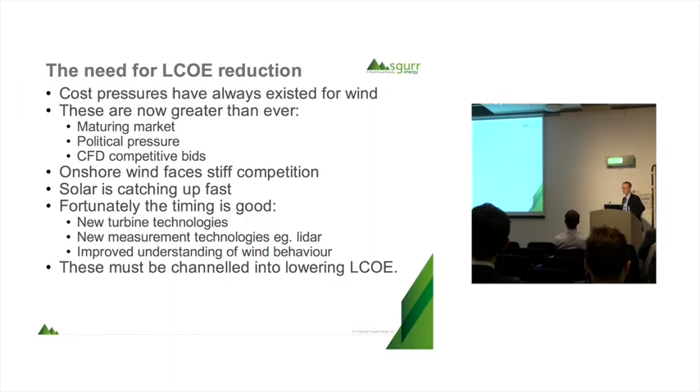Right, the topic at hand then, and the need for performance enhancement, of course, comes from the need for cost of energy reduction. Cost pressures have always existed for wind, but they're now greater than ever. We have a maturing market, we have political pressure to reduce costs to the consumer, and in the UK we have contracts for difference coming in with competitive bids, so these pressures are greater than ever.

Onshore wind faces stiff competition from other technologies, and in particular we have solar catching up fast and costs coming down very rapidly. But fortunately the timing is good, and we have new turbine technologies coming forward. We've got new measurement technologies like LiDAR, and we have an improved understanding of wind behaviour, and that all presents opportunities which can be channelled into lowering the cost of energy.

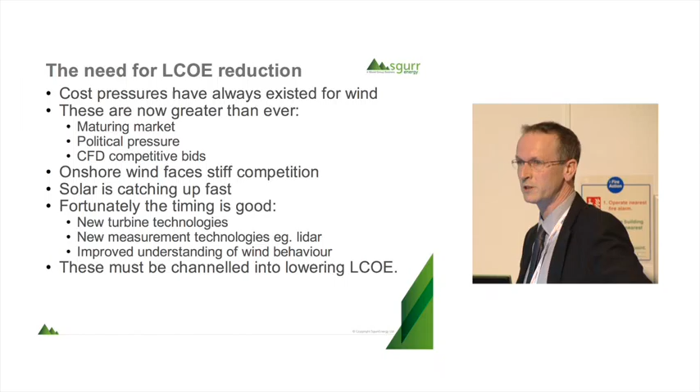How should they be tackled? Well, in various ways actually. Faster and smoother planning process has a surprising impact on cost of energy. Increased turbine size is another one, but that is in turn dictated by the planning envelope, funnily enough, quite particularly in the UK. Turbine innovation, optimised wind farm design, grid competitiveness, and grid innovation, and we are seeing some real grid innovations coming through, and cheaper finance.

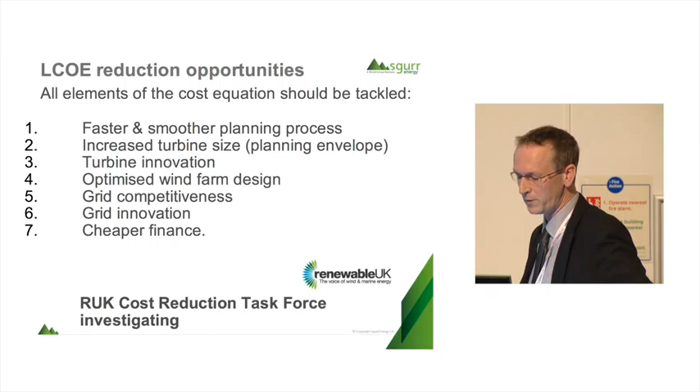So really quite a variety of issues there, and for example, the RUK Cost Reduction Task Force recently considered all of these, and we were involved in that process, and the outcome of that was the determination of active steps to ensure onshore wind becomes the lowest cost new generation technology of any type, not just any renewables, by 2020. There's a belief that can be achieved if certain things are done.

But for today, I'm going to focus on items 3 and 4, so turbine technology innovation and optimised wind farm design. In our view, these two together can make a significant contribution to the ongoing cost reduction.

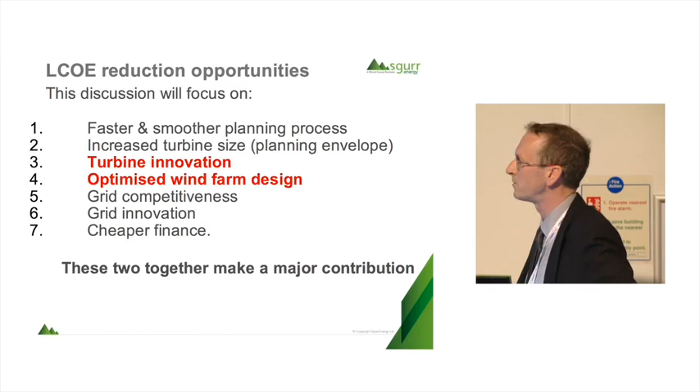We're not alone. We are seeing that owners out there are starting to put more attention to operational performance. The focus has been develop and build for the past while, but now there's a lot more up and running. We've heard some really good things already this afternoon about things being done to improve the output and performance of wind turbines, and that's been driven by owners now, and the owners are wanting to sweat their assets.

They want to enhance their revenue streams naturally, but they also want to free themselves to an extent from the grip of the OEMs. And in this sector, that grip is particularly tight. We see it with all technologies, but in wind, for some reason, it's very tight. Also enhance the value at pre-disposal and acquisition, and that's where the value of output is fully realised.

And the attention to date, I would say, has been mainly on reliability and OPEX, and that's absolutely fine, but this is part of the solution, and our argument would be that performance enhancement has got a lot more to deliver in addition.

Well, how, you may say? Well, actually, there are a range of contributors to performance enhancement: forestry restructuring, yaw alignment optimisation, aerodynamic improvements, control and pitch optimisation, and wind farm control. And I'll go into each of these in a bit more detail.

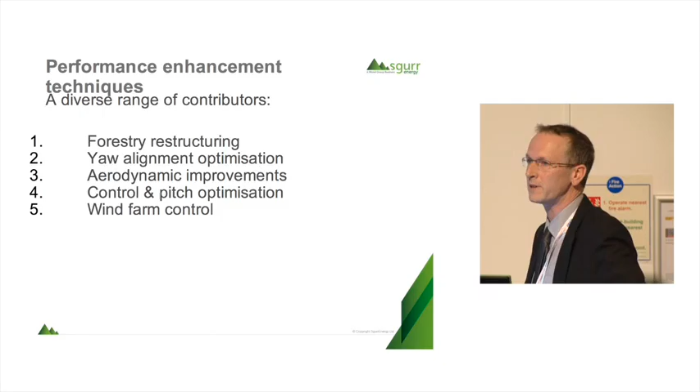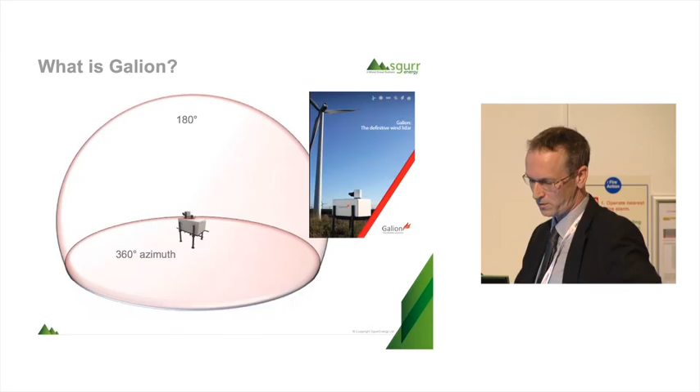Quite a lot of that is underpinned by better measurement, and in particular LiDAR, and the way LiDAR works - I'll not go into the details - but there is a bit of a revolution going on in wind at the moment, because we are now able, through LiDAR, to see how a wind field is behaving, not just measuring at one point and then using computer models to estimate what goes on. We can see up to a range of several kilometres what happens, and that's allowing us to optimise.

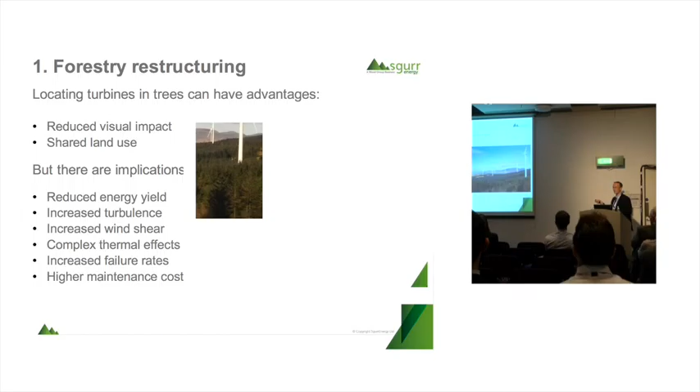Reduced energy yield - the trees sap energy out of the wind, and that extends up above the canopy to the turbine, reducing output. Increased turbulence, increased wind shear, and even complex thermal effects. If you're a glider pilot, you'll know all about that. That also affects the performance of the turbines above them.

There are also implications for maintenance and increased failure rates and increased maintenance costs. So you have almost a triple whammy: reduced energy in the wind, reduced power curve efficiency, and increased maintenance costs. So basically, trees and turbines do not go well together.

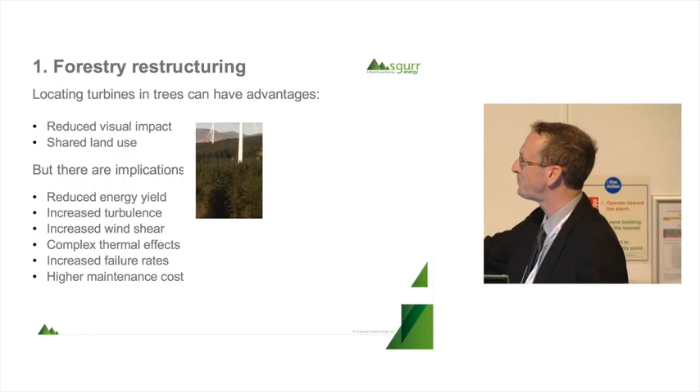So, restructuring options - there are things you can do, as long as you understand the effects of the trees on the wind, and that understanding is still really emerging now. But we'll have an opportunity with LiDAR to better measure and understand what's going on, and therefore refine our CFD models to make them more accurate.

So what can you do? Well, you can fell trees within the wind farm - fell as many as you can. But also on the approaches, even up to 5 kilometres in certain locations, can have a beneficial effect. Adopt short rotation to minimise the height trees reach before they're felled, which might involve compensation to the forestry owner, but that might still be good value.

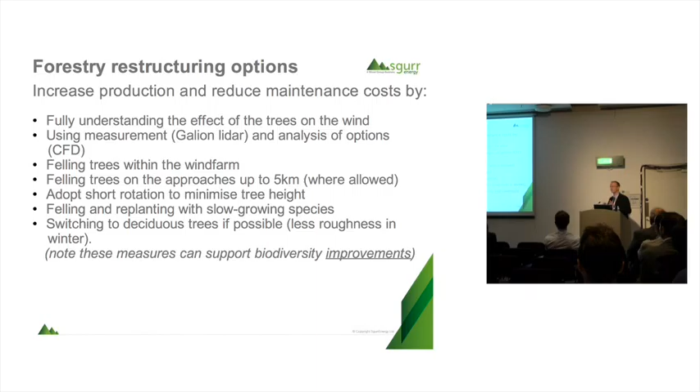Felling and replanting with slow-growing species, because they take a long time to grow - a lot longer even than the lifetime of a wind farm - and switching to deciduous trees if possible, because there's less roughness in winter when the trees lose their leaves, which is quite a significant effect. And all of these measures can actually support biodiversity, so felling trees isn't necessarily a bad thing - it can be good for the habitat and for biodiversity.

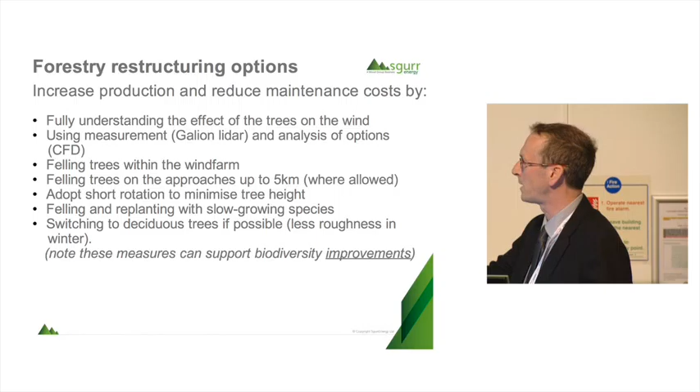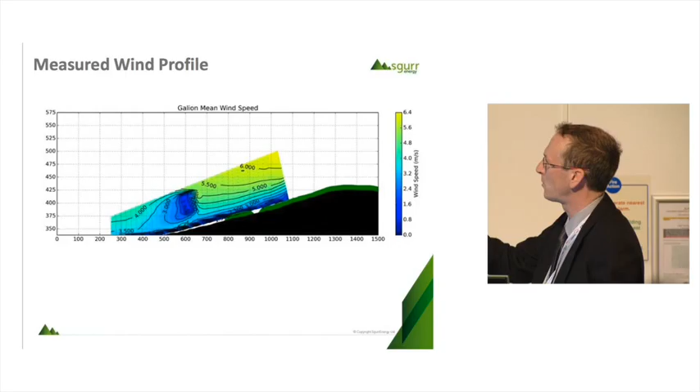Just to show you some information - this is from a study we did on a wind farm in southern Scotland. This is the LiDAR-measured wind speed coming off the forestry down the hill to the left towards the turbine, and you can see the turbine wake there. This is a CFD model without the turbine, so this is what was modelled, and after fine-tuning the CFD model, that's the level of agreement. This is just a snapshot, but over a range of conditions we want to get that agreement as close as possible, and that's what we can now do using LiDAR.

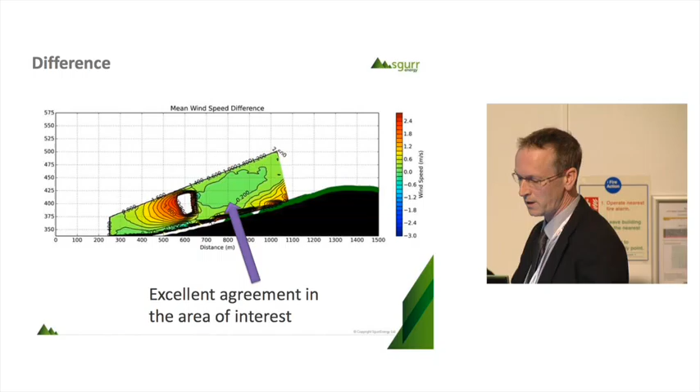Moving on, we heard a bit from Simon about yaw misalignment, and yes, we would agree there are issues there, quite significant issues, which are, if anything, getting more difficult over time. Think about it - a wind vane at the back of a nacelle measuring wind direction is pretty crude. It's been developed through necessity, but it's prone to operating error and setup error. Fundamentally, it's one point representing a huge disk, which nowadays is greater in area than a football pitch. There's no way one point can represent it properly.

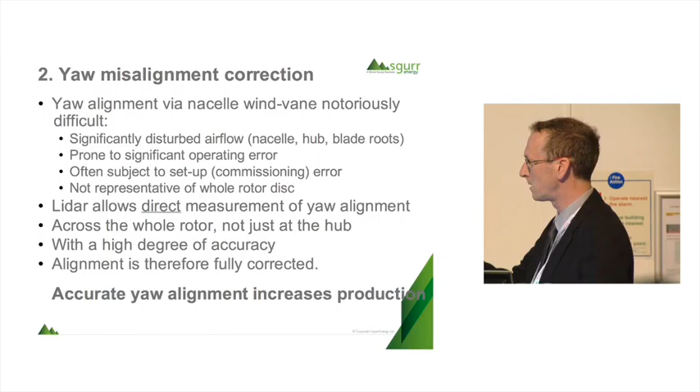But LiDAR gives you the chance now to deal with that by looking across the whole of the rotor and then accurately aligning. This is a technique we've been developing, not looking forward, but looking backwards - LiDAR on the nacelle, looking back at the alignment of the wake. When it's properly aligned, you get that; when it's misaligned, you get the graph on the right. That difference, if accurately picked up, allows you to properly align the turbine.

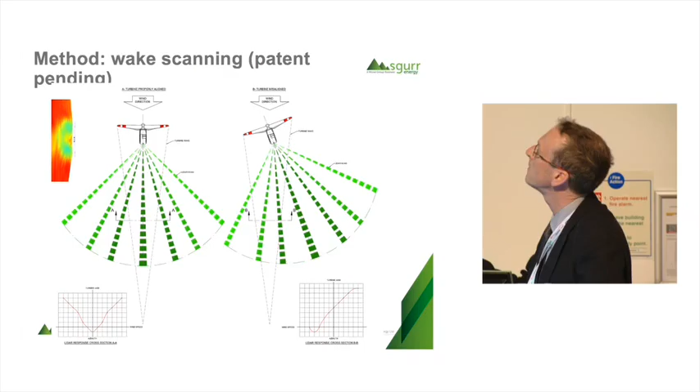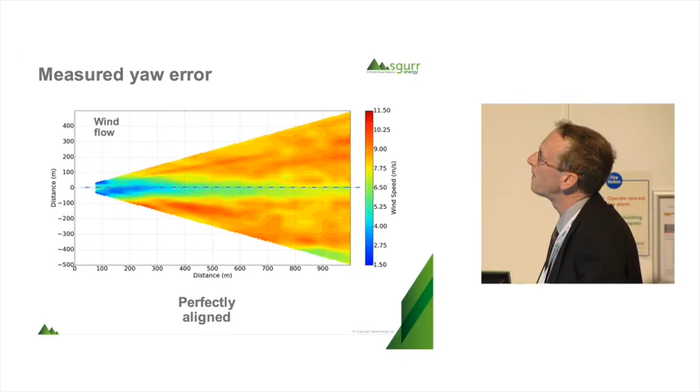We've put this to the test - we've had a turbine tested in Germany now for a range of conditions. At this point in time, it was well aligned, and you can see the wake well aligned with the axis. It was out by about 15 degrees at another point, resulting in a 7% performance loss. The important thing is the spread you get over the piece.

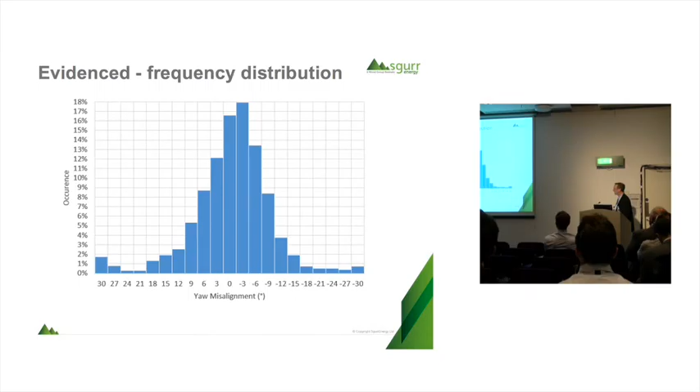This was a modern turbine in a relatively stable wind flow - and look at that spread. That's what we've measured has actually occurred in reality with wind vane control. We know for a fact we can improve on that significantly and therefore recover energy yield.

Aerodynamic improvement - we also see potential here. If you think about it as an aerodynamicist, the blade on the right would be the one you'd ideally design for your wind turbine, but that's not what you get. You get the blade on the left, because it has to be manufacturable and deal with structural loading. So there's a compromise there, which means aerodynamic losses. The question is, is that the best compromise?

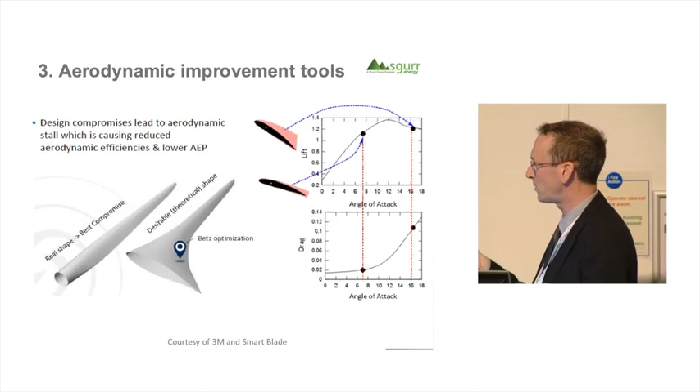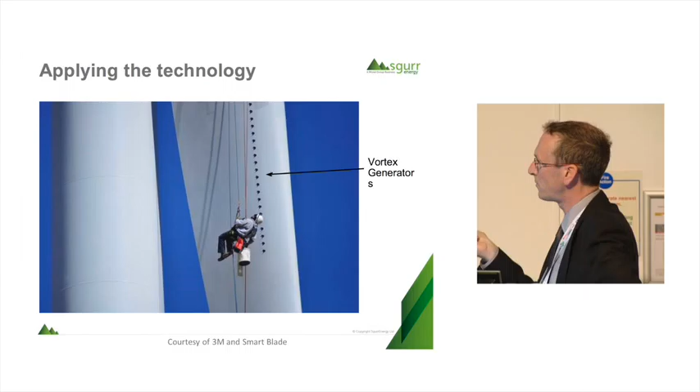In our experience, on a lot of sites with complex flows, that's not the case, and there are various things you can do. One is to attach vortex generators, which maintain attachment of the flow to the blade, but it's how you go about it that's quite critical to whether you achieve the performance enhancement. Our view is a proportion of losses can be recovered. Vortex generators are an established technique which can be effective, but positioning is key.

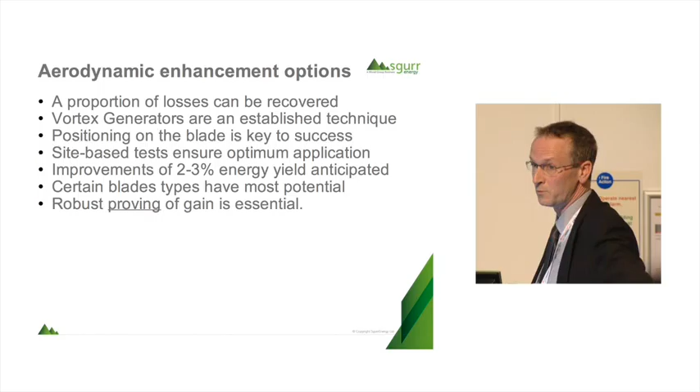And for that, you need site-based tests to know that you have the optimum application of the vortex generators. With that, improvements of 2 to 3% in energy yield can be delivered, and we have tests underway at the moment to fully prove what's achieved and the best technique for measuring and proving it.

Okay, control and pitch. This was mentioned earlier, and we totally agree that there are some real issues with control optimization out there. We see some turbines which, in our view, are significantly non-optimally controlled. The point is that real site conditions differ from design, inevitably more complex in most locations anyway. So wind shear, veer and turbulence mean control around the knee of the curve is often non-optimal.

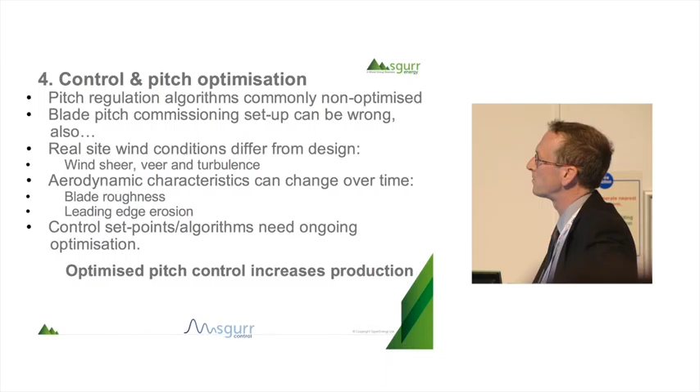But not just that, aerodynamic characteristics can change over time. Blade roughness, leading edge erosion and so on mean that your optimal control should be different and it needs to adapt. So control set points and algorithms need ongoing optimization, and standard controllers don't necessarily do that. So optimized pitch control can increase production as well.

And as we saw earlier, around about the knee of the curve is quite often where you have errors which are quite insidious or difficult to spot, but they can be significant in terms of energy production, and that's where we see the most potential.

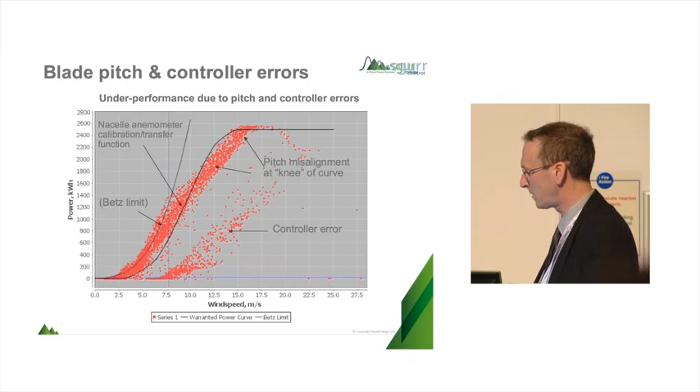And finally, wind farm control. The point here is that wind farms should be managed as a single unit rather than a collection of individual turbines all trying to maximise their own production. If you do that, you can increase total output, but also reduce wake-induced loadings, which is significant for larger wind farms, and meet grid code and balancing requirements.

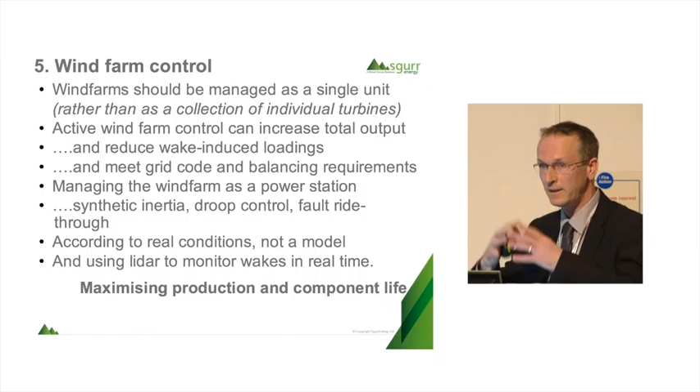And if you manage the wind farm as a power station, you can provide synthetic inertia, droop control, fault ride-through and so on. These things are not fully yet appreciated by the grid regulators, but I think that will come. And when it does, these things will have value, and therefore the ability to do that according to real conditions, not a model, will become key. Again, if you've got LiDAR, you can do it based on real-time conditions.

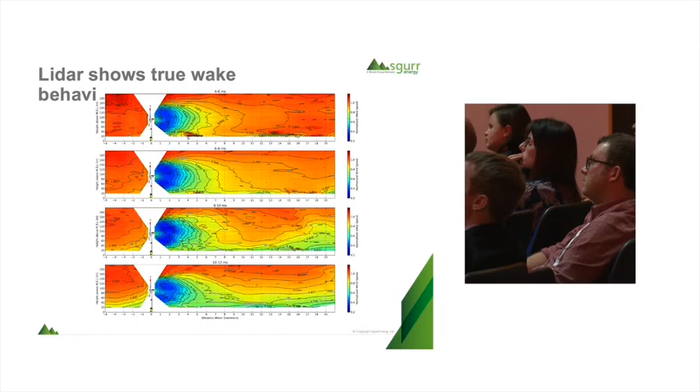One was, if you think about it, you've got an imbalance between above the rotor and the bottom of the rotor. Because of that, you can actually see here, especially there and there, almost a cascade effect as the high energy wind comes in above the turbine and down to depress the wake. That has implications for the shape of the wake and also wake recovery, and that's not been appreciated to date.

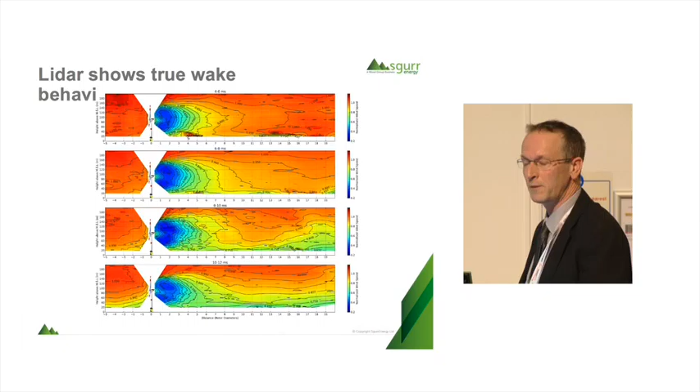The other thing that was quite interesting was inflow to the turbine, particularly at lower wind speeds, and you can see there an inclined inflow. As the flow is moving into the turbine, it's actually inclining up the wake, which has implications for aerodynamic efficiency of the turbines. So two quite significant findings which weren't appreciated before we had LiDAR, but now we can see them, and now the opportunity is to build them into our models and into our designs to deal with them properly.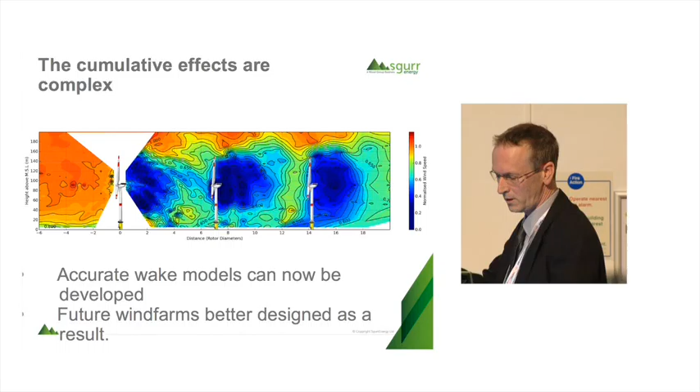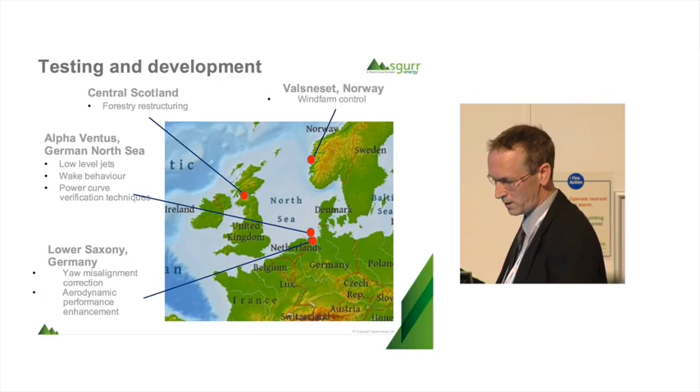Just to show the locations where we've been doing work: central Scotland, northern Germany, also in the German North Sea, and in Norway. All of that work has underpinned some of what I've been talking about.

And finally, equally important to delivering improvements in performance is being able to measure and prove that you've delivered it, and because of that we have quite a lot of work underway on the best techniques to do that, and in some cases combinations of techniques which allow us to establish that we have achieved what we thought we would achieve.

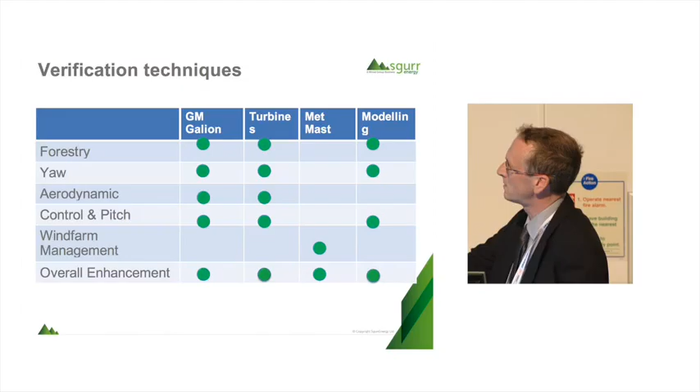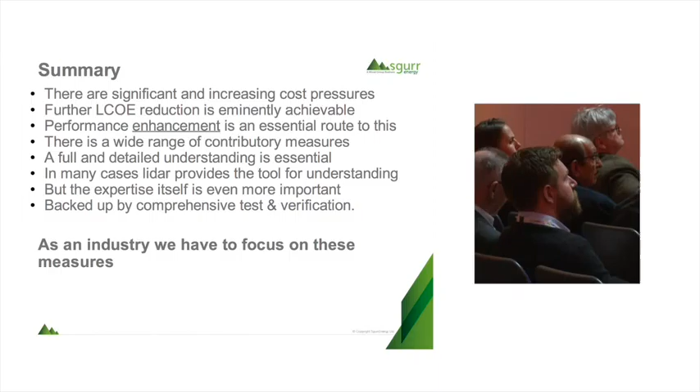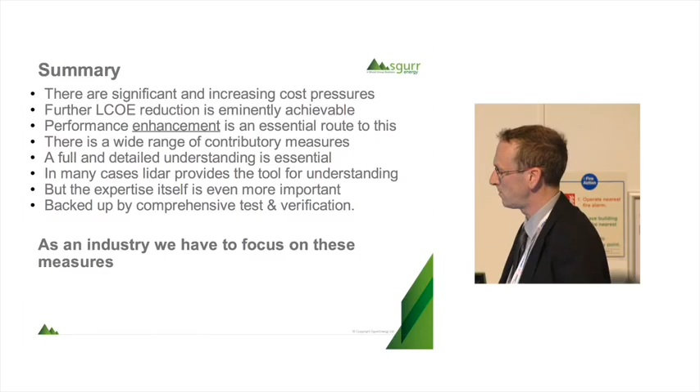So in summary, there are significant increasing cost pressures on onshore wind, but optimistically, further reduction is eminently achievable, and performance enhancement is an essential route to that. There is a wide range of contributory measures. A full and detailed understanding is essential. In many cases, LiDAR provides a tool for understanding, but the expertise itself is even more important, backed up by comprehensive test and verification. As an industry, we have to focus on these measures. Okay, thank you.